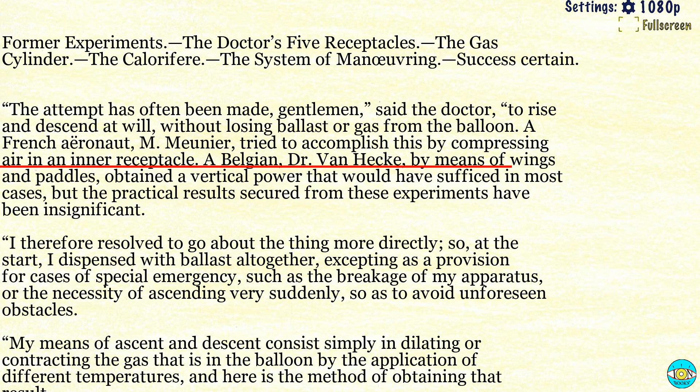Success certain. "The attempt has often been made, gentlemen," said the doctor, "to rise and descend at will, without losing ballast or gas from the balloon. A French aeronaut, M. Meunier, tried to accomplish this by compressing air in an inner receptacle. A Belgian, Dr. Van Hecke, by means of wings and paddles, obtained a vertical power that would have sufficed in most cases, but the practical results secured from these experiments have been insignificant.

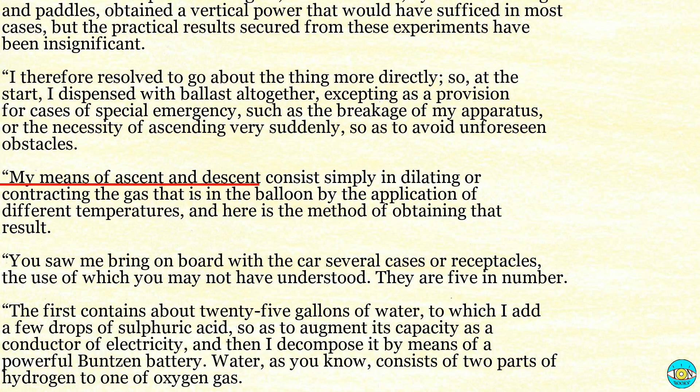I therefore resolved to go about the thing more directly, so, at the start, I dispensed with ballast altogether, excepting as a provision for cases of special emergency, such as the breakage of my apparatus or the necessity of ascending very suddenly, so as to avoid unforeseen obstacles. My means of ascent and descent consist simply in dilating or contracting the gas that is in the balloon by the application of different temperatures, and here is the method of obtaining the result.

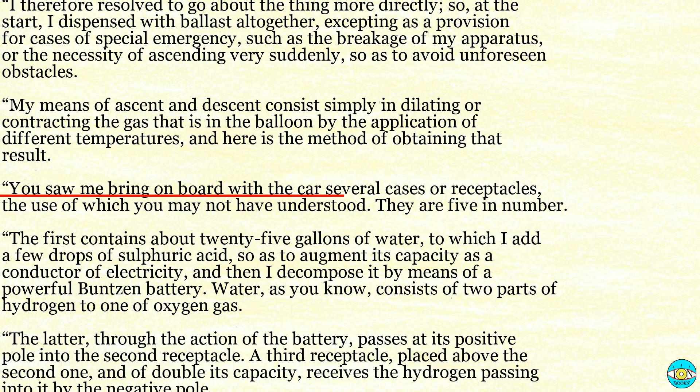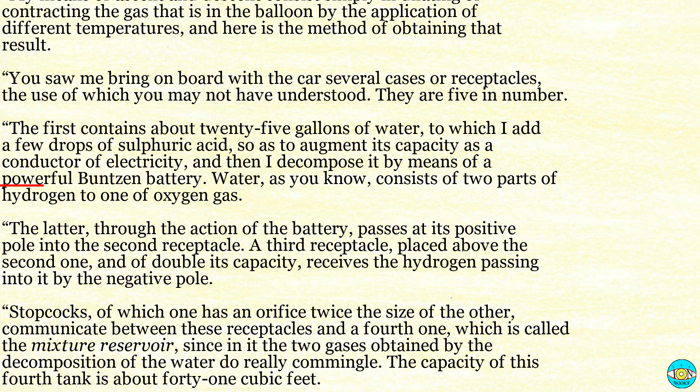You saw me bring on board with the car several cases or receptacles, the use of which you may not have understood. They are five in number. The first contains about 25 gallons of water, to which I add a few drops of sulphuric acid, so as to augment its capacity as a conductor of electricity, and then I decompose it by means of a powerful Buntzen battery. Water, as you know, consists of two parts of hydrogen to one of oxygen gas. The latter, through the action of the battery, passes at its positive pole into the second receptacle.

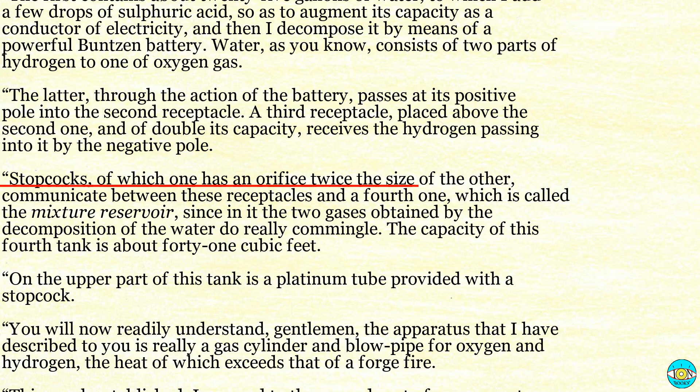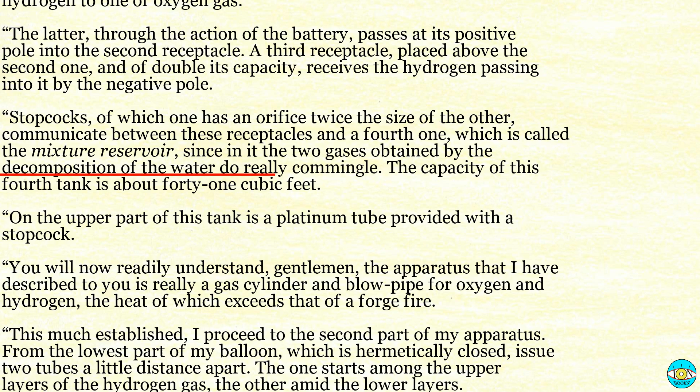A third receptacle, placed above the second one, and of double its capacity, receives the hydrogen passing into it by the negative pole. Stopcocks, of which one has an orifice twice the size of the other, communicate between these receptacles and a fourth one, which is called the mixture reservoir, since in it these two gases obtained by the decomposition of the water do really commingle. The capacity of this fourth tank is about 41 cubic feet. On the upper part of this tank is a platinum tube provided with a stopcock.

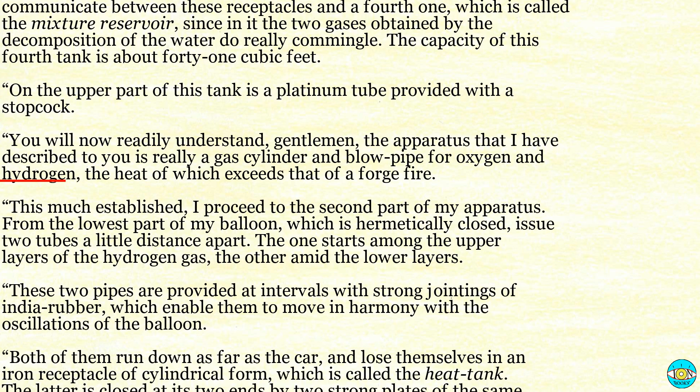You will now readily understand, gentlemen, the apparatus that I have described to you is really a gas cylinder and blowpipe for oxygen and hydrogen, the heat of which exceeds that of a forge fire. This much established, I proceed to the second part of my apparatus. From the lowest part of my balloon, which is hermetically closed, issue two tubes a little distance apart. The one starts among the upper layers of the hydrogen gas, the other amid the lower layers. These two pipes are provided at intervals with strong jointings of india rubber, which enable them to move in harmony with the oscillations of the balloon.

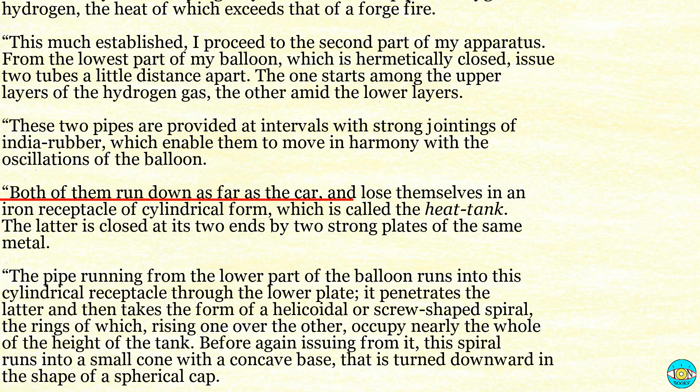Both of them run down as far as the car and lose themselves in an iron receptacle of cylindrical form, which is called the heat tank. The latter is closed at its two ends by two strong plates of the same metal. The pipe running from the lower part of the balloon runs into this cylindrical receptacle through the lower plate. It penetrates the latter and then takes the form of a helicoidal or screw-shaped spiral, the rings of which, rising one over the other, occupy nearly the whole of the height of the tank.

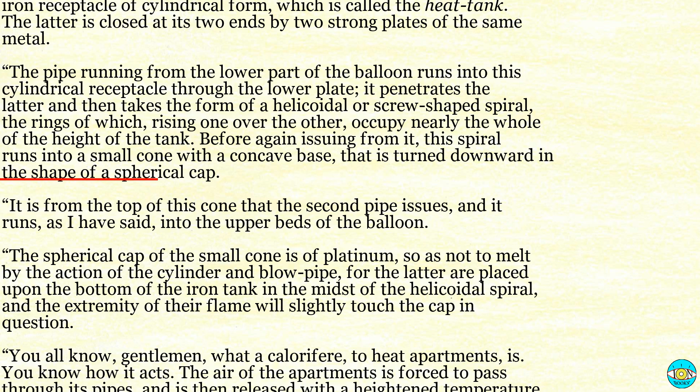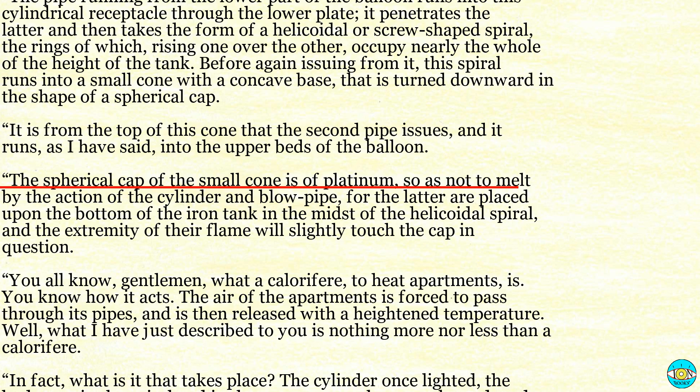Before again issuing from it, this spiral runs into a small cone with a concave base, that is turned downward in the shape of a spherical cap. It is from the top of this cone that the second pipe issues, and it runs, as I have said, into the upper beds of the balloon. The spherical cap of the small cone is of platinum, so as not to melt by the action of the cylinder and blowpipe, for the latter are placed upon the bottom of the iron tank, in the midst of the helicoidal spiral, and the extremity of their flame will slightly touch the cap in question.

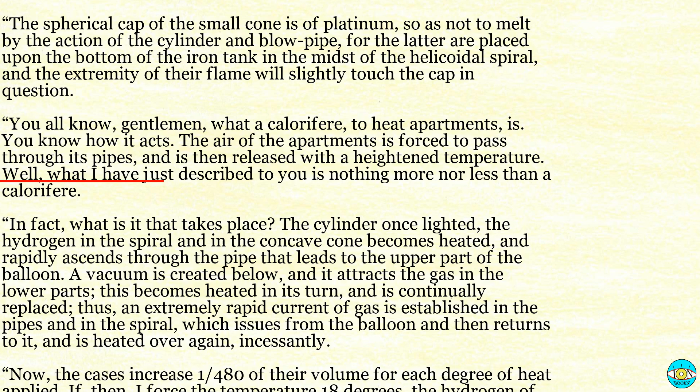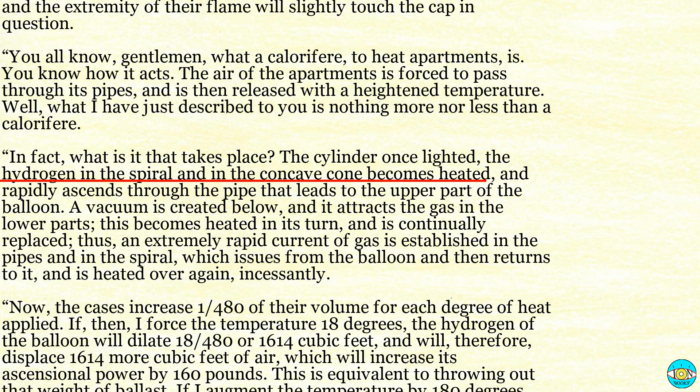You all know, gentlemen, what a calorifere, to heat apartments, is. You know how it acts. The air of the apartment is forced to pass through its pipes, and is then released with a heightened temperature. Well, what I have just described to you is nothing more nor less than a calorifere. In fact, what is it that takes place? The cylinder once lighted, the hydrogen in the spiral and in the concave cone becomes heated, and rapidly ascends through the pipe that leads to the upper part of the balloon.

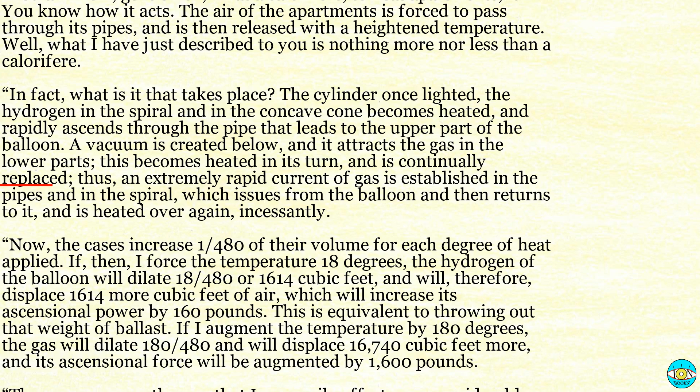A vacuum is created below, and it attracts the gas in the lower parts. This becomes heated in its turn, and is continually replaced. Thus an extremely rapid current of gas is established in the pipes and in the spiral which issues from the balloon and then returns to it, and is heated over again incessantly.

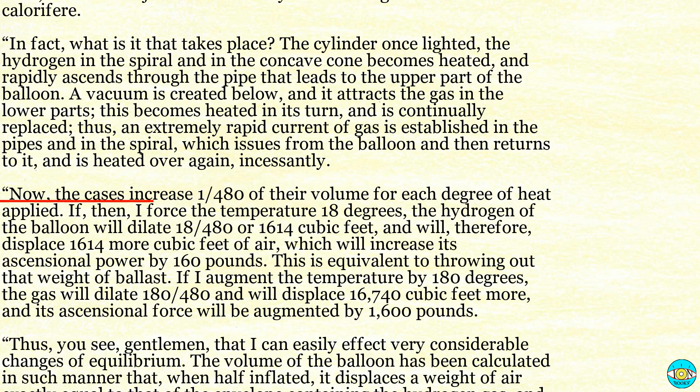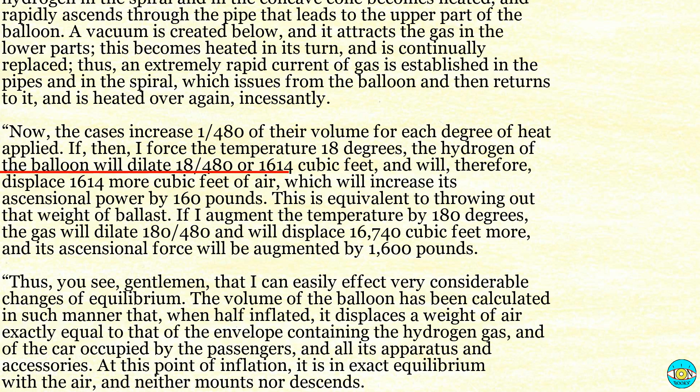Now, the gases increase 1/480th of their volume for each degree of heat applied. If, then, I force the temperature 18 degrees, the hydrogen of the balloon will dilate 18/480ths, or 1,614 cubic feet, and will therefore displace 1,614 more cubic feet of air, which will increase its ascensional power by 160 pounds. This is equivalent to throwing out that weight of ballast.

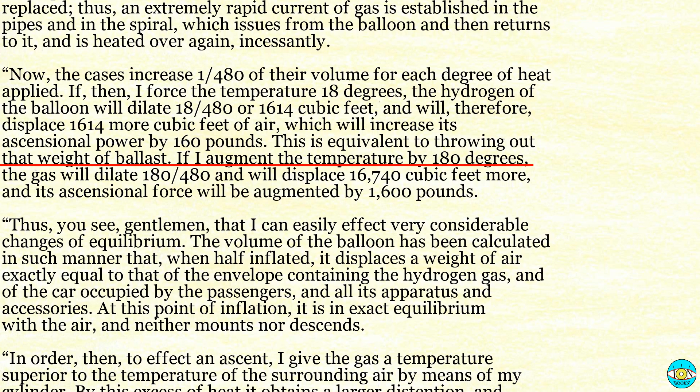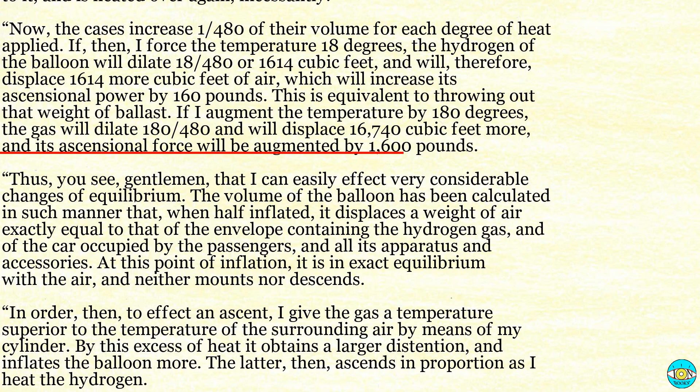If I augment the temperature by 180 degrees, the gas will dilate 180/480ths, and will displace 16,740 cubic feet more, and its ascensional force will be augmented by 1,600 pounds. Thus you see, gentlemen, that I can easily effect very considerable changes of equilibrium.

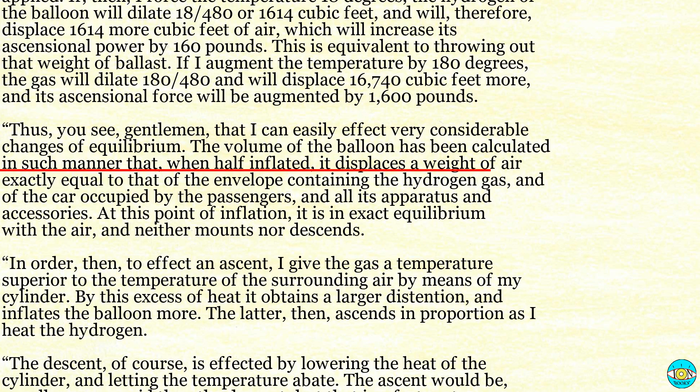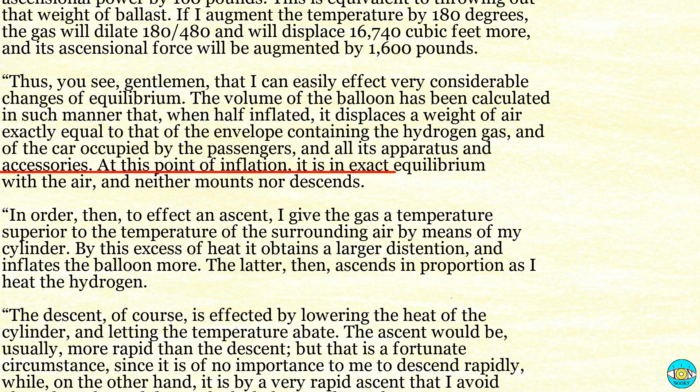The volume of the balloon has been calculated in such manner that, when half inflated, it displaces a weight of air exactly equal to that of the envelope containing the hydrogen gas, and of the car occupied by the passengers, and all its apparatus and accessories. At this point of inflation it is in exact equilibrium with the air, and neither mounts nor descends.

In order then to effect an ascent, I give the gas a temperature superior to the temperature of the surrounding air, by means of my cylinder. By this excess of heat it obtains a larger distension, and inflates the balloon more. The latter then ascends in proportion as I heat the hydrogen. The descent, of course, is effected by lowering the heat of the cylinder, and letting the temperature abate.

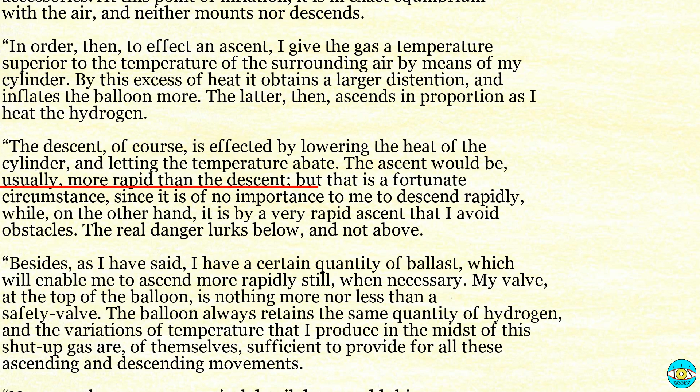The ascent would be, usually, more rapid than the descent, but that is a fortunate circumstance, since it is of no importance to me to descend rapidly, while, on the other hand, it is by a very rapid ascent that I avoid obstacles. The real danger lurks below, and not above. Besides, as I have said, I have a certain quantity of ballast, which will enable me to ascend more rapidly still, when necessary. My valve at the top of the balloon is nothing more nor less than a safety valve.

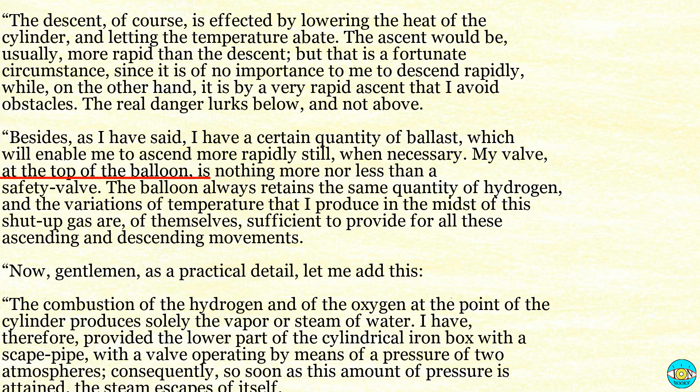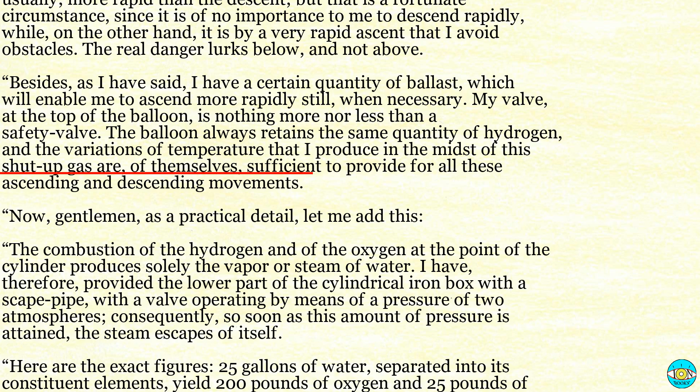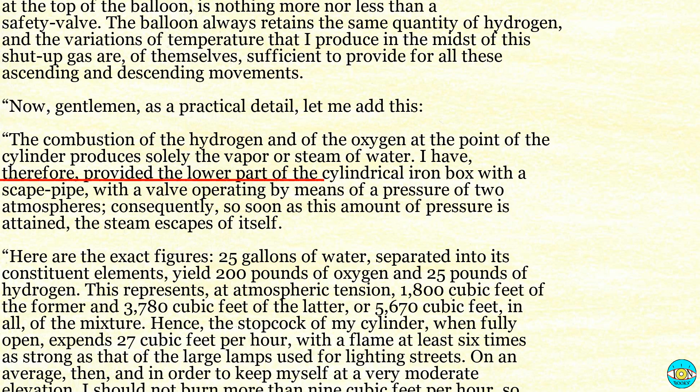The balloon always retains the same quantity of hydrogen, and the variations of temperature that I produce in the midst of this shut-up gas are, of themselves, sufficient to provide for all these ascending and descending movements. Now, gentlemen, as a practical detail, let me add this. The combustion of the hydrogen and of the oxygen at the point of the cylinder produces solely the vapor or steam of water. I have, therefore, provided the lower part of the cylindrical iron box with an escape pipe, with a valve operating by means of a pressure of 2 atmospheres. Consequently, so soon as this amount of pressure is attained, the steam escapes of itself.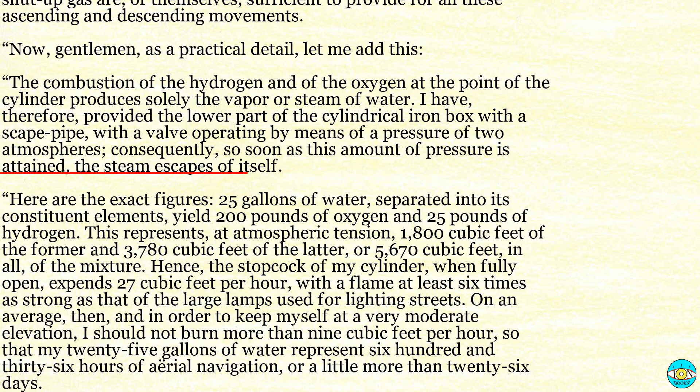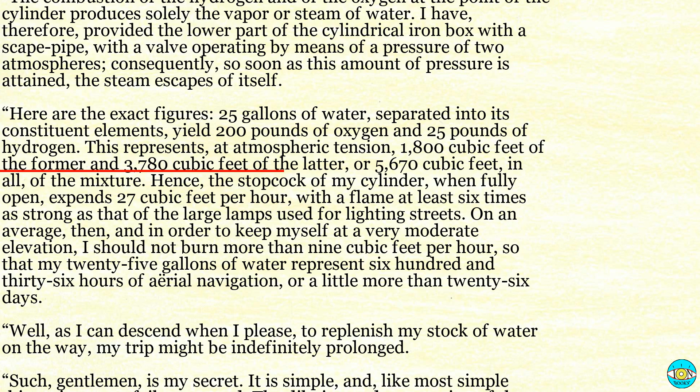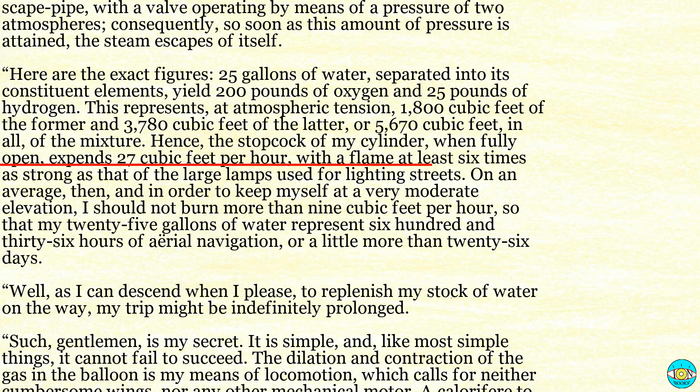Here are the exact figures. 25 gallons of water, separated into its constituent elements, yield 200 pounds of oxygen and 25 pounds of hydrogen. This represents, at atmospheric tension, 1,800 cubic feet of the former and 3,780 cubic feet of the latter, or 5,670 cubic feet in all of the mixture. Hence the stopcock of my cylinder, when fully open, expends 27 cubic feet per hour, with a flame at least 6 times as strong as that of the large lamps used for lighting streets.

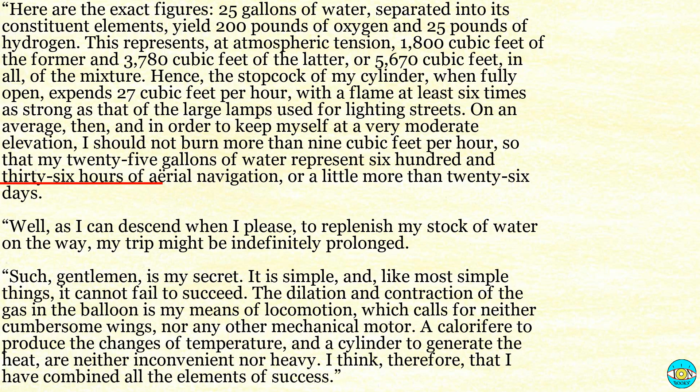On an average, then, and in order to keep myself at a very moderate elevation, I should not burn more than 9 cubic feet per hour, so that my 25 gallons of water represent 636 hours of aerial navigation, or a little more than 26 days. Well, as I can descend when I please, to replenish my stock of water on the way, my trip might be indefinitely prolonged. Such, gentlemen, is my secret. It is simple, and like most simple things, it cannot fail to succeed.

The dilation and contraction of the gas in the balloon is my means of locomotion, which calls for neither cumbersome wings nor any other mechanical motor. A calorifere to produce the changes of temperature, and a cylinder to generate the heat, are neither inconvenient nor heavy. I think, therefore, that I have combined all the elements of success."

Dr. Ferguson here terminated his discourse, and was most heartily applauded. There was not an objection to make to it. All had been foreseen and decided. "However," said the captain, "the thing may prove dangerous." "What matters that?" replied the doctor, "provided that it be practicable." End of Chapter 10 of Five Weeks in a Balloon.